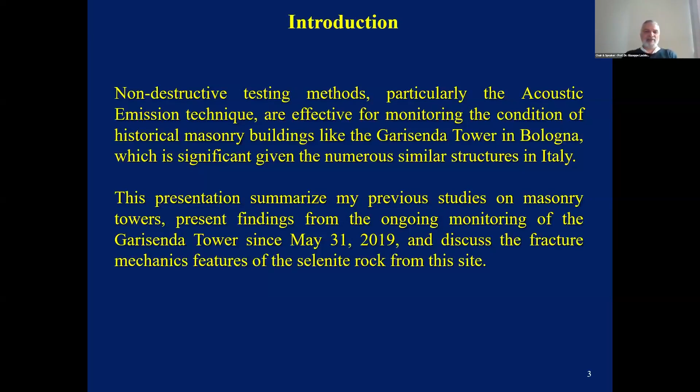I can start with a little introduction, saying that non-destructive testing methods, particularly the acoustic emission technique, are effective for monitoring the condition of historical masonry buildings like the Garisenda Tower in Bologna, which is significant given the numerous similar structures in Italy. This presentation summarizes my previous studies on masonry towers, presents findings from the ongoing monitoring of the Garisenda Tower since May 31, 2019, and discusses the fracture mechanics features of the selenite rock from this site.

Just a few words related to my previous monitoring of leaning towers in Italy. These are the towers of Alba, a city near Torino in Italy. Some years ago, we made, with other colleagues, the monitoring of all the ancient towers in Alba. This was published in some papers on important international journals.

Then we made the monitoring of this tower, the Asinelli Tower in Bologna. This is the tallest leaning tower in Italy: it is 97.30 meters tall and is leaning on the west side. On this monitoring, we published some papers, two of which are reported in this slide.

The other tower, the shortest one, is the Garisenda Tower, which is inclined towards the southeast direction and is not in such good condition now.

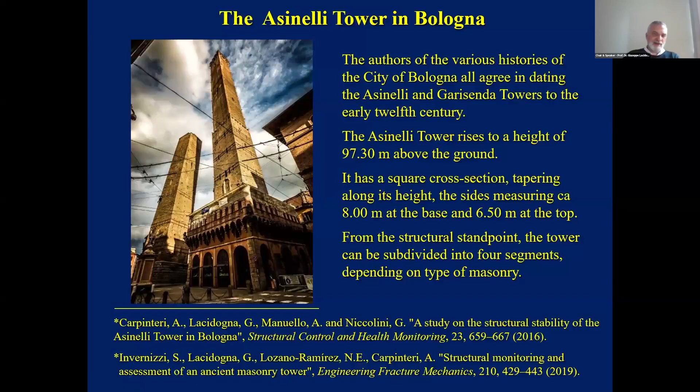Some words relating to the acoustic emission technique, that all the people speaking now, and probably also hearing me in this presentation, know about. But what is acoustic emission?

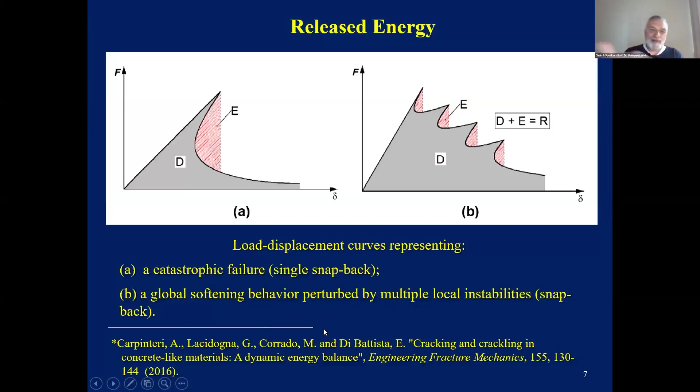We can have a single snapback instability or multiple snapback instability, depending on the test you are doing. This fact is well explained in this paper, which you can read if you want in the next days.

I will speak about acoustic emission monitoring in this presentation using a new device we have in our laboratory of structural mechanics at Politecnico di Torino, which is able to detect signals and send that data to a cloud wirelessly. Therefore, we can work comfortably, sitting at the table in our office. It's not necessary to go to the site, take the data, and go again to the office to make the elaboration.

What about the Garisenda Tower? It was completed in the early 12th century. It is now 48 meters tall and has a slope of 3.22 meters towards the west-south direction, in the opposite direction to the Asinelli Tower. It was originally 60 meters tall, but it was cut down because it inclined just after construction.

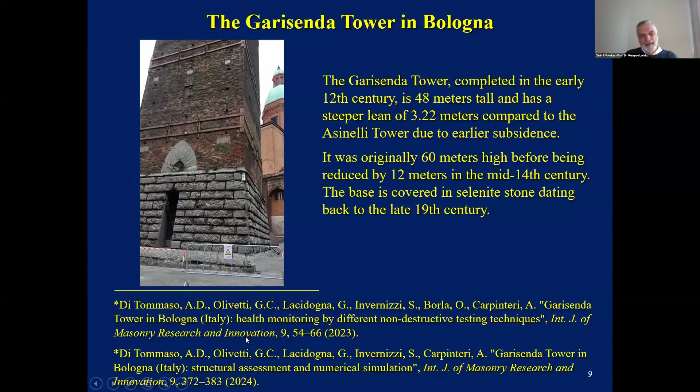Now it is 48 meters tall, and it is probably one of the most inclined towers in Italy, more than the Pisa Tower and so on. We wrote some papers on this problem in the Journal of Masonry, International Journal of Masonry Research and Innovation.

What about the monitoring system? I'll just speak of some of the devices applied in the tower: acoustic emission sensors, and fiber optic sensors, which were not from our laboratory at Politecnico di Torino, but were put in place by a firm named Smart Monitoring Italia, from the international group Osmos, whose principal headquarters is in France. Then there are also some thermometers for measuring the internal and external temperature of the tower.

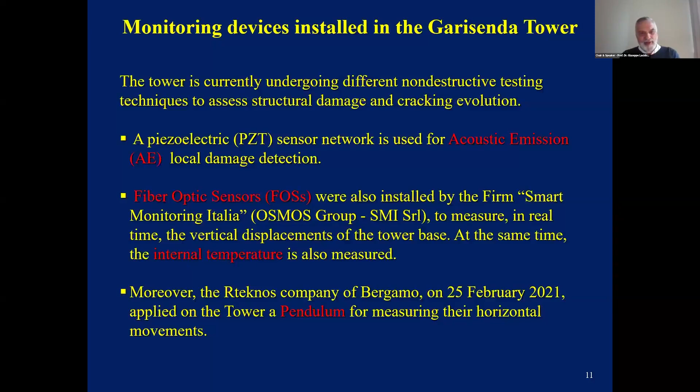More recently, a pendulum was also applied in the tower by the firm named Rteknos, a company of Bergamo in Italy. All these data are synchronized with the UTC time reference, so it's possible to make correlations between the data detected by the various sensors.

As regards the acoustic emission monitoring, the first device was applied on the 31st of May 2019 and is currently ongoing, for a total monitoring time of about 6 years to date.

Some technical data, not so important in this case, but the acquisition of data: the sampling rate is fixed at 5 megasamples per second, at 16 bits.

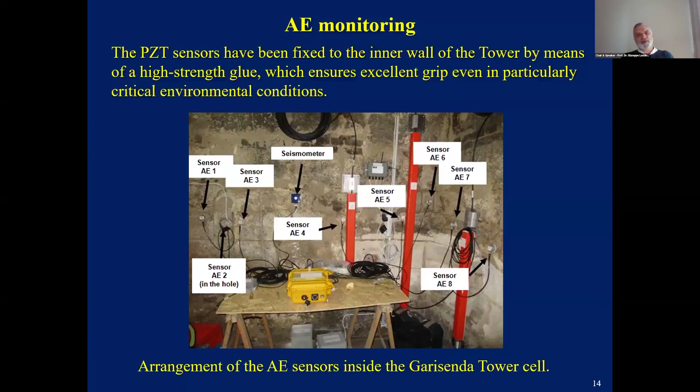At the beginning of the monitoring, there were also seismometers to understand if there are vibrations due to the earthquake or due to the environmental influence of traffic on the tower.

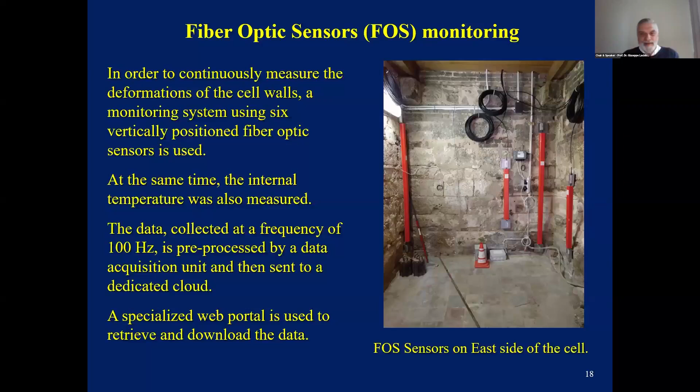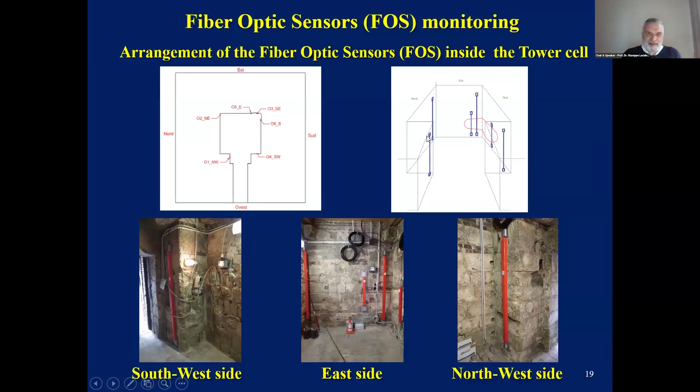What we found when we started monitoring is that during the winter season, we have naturally a contraction of the basement of the tower where the fiber optic sensors were applied, and in concomitance, we have had an increase in the acoustic emission hits.

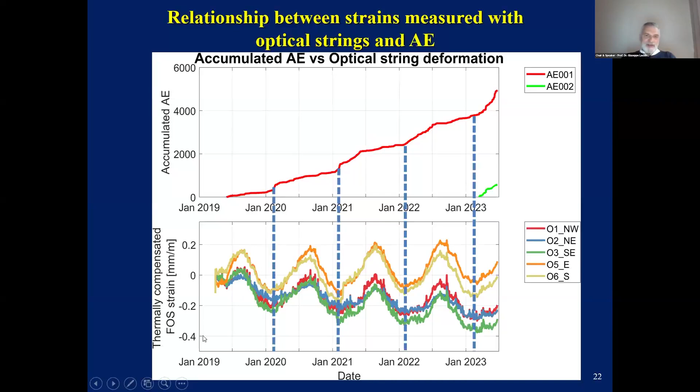This is another interesting diagram in which we can see that each time there is cold in the tower, we have a sudden increase in the acoustic emission hits related to apparatus number 1, and this continues from the start of the monitoring up to January 2023.

But as I said a few minutes ago, on 22 June 2023, we have a sudden increase in the acoustic emission events - look at this diagram in red - and also a sudden increase in the acoustic emission of device number 2. Therefore, this is in concomitance with an increase in the contraction, the vertical displacement of the tower.

Therefore, the area all around the tower was closed to people and also to traffic.

This diagram is also interesting because it represents the correlation between accumulated acoustic emission hits and the variation of temperature. You can see that when the temperature is low, around 10 degrees Celsius, 5 degrees, we have an increase in the acoustic emission. When the temperature is high, that is in the summer season, we have not much acoustic emission. And this is repeated for a lot of time.

But starting from signal number 6,000, we have behavior that is not so regular. Therefore, acoustic emission - and that means microcracks - increasing also during the summer season. This is for device number 1 and also for device number 2.

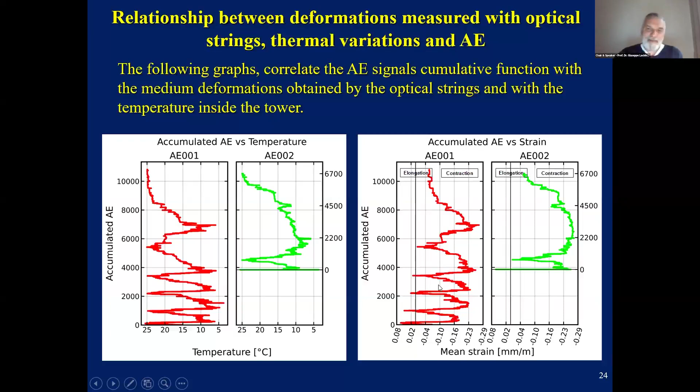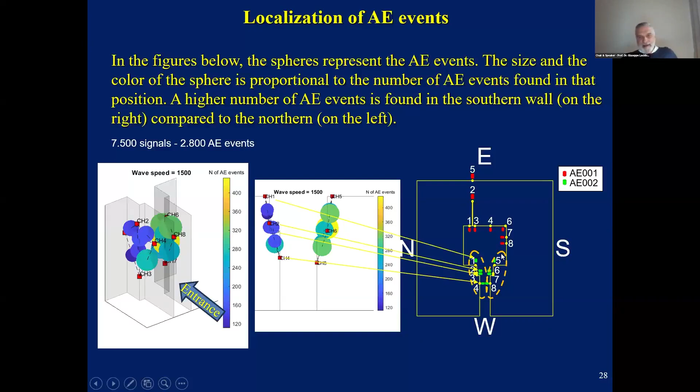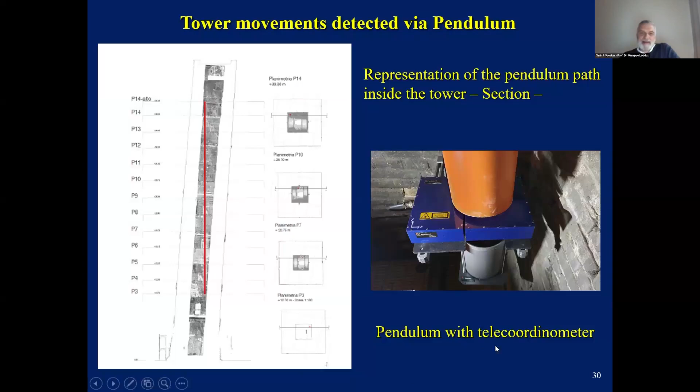The weight of the pendulum is embedded in a glass container with oil, and the horizontal displacement of the tower is calculated, detected by a telecoordinometer that is a series of lasers.

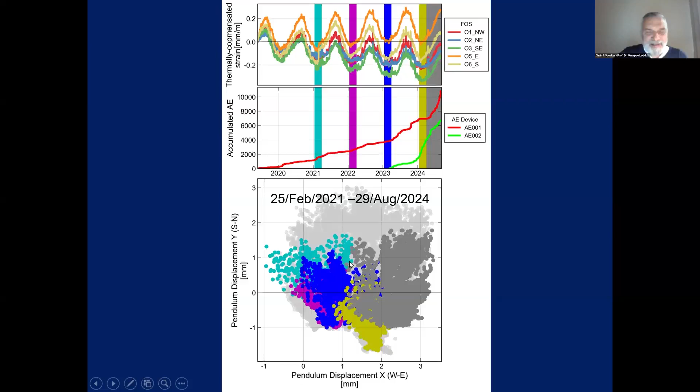This is another interesting diagram that represents the position of the tower during each winter season. This is the cloud of all the positions of the tower detected by the pendulum, and I can show you this series of diagrams. When we were in the winter of 2021, the tower was in the west direction. Therefore, we don't have a lot of acoustic emission signals, as you can see here.

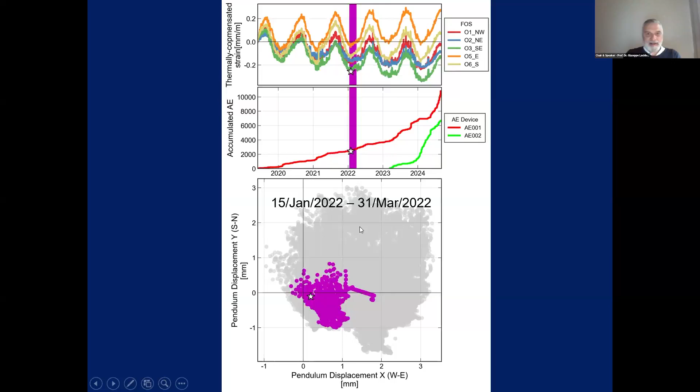When we were in the winter of 2022, the tower was in this position. Therefore, we don't have a lot of acoustic emission signals. There were signals, but not a lot. Then the tower displaces into this position, and when the area around the tower was closed, the tower was in this position.

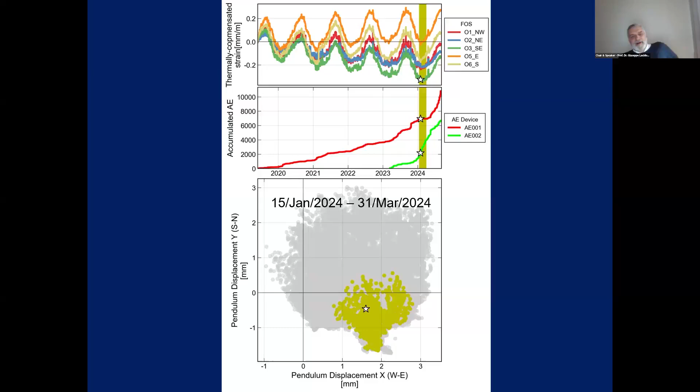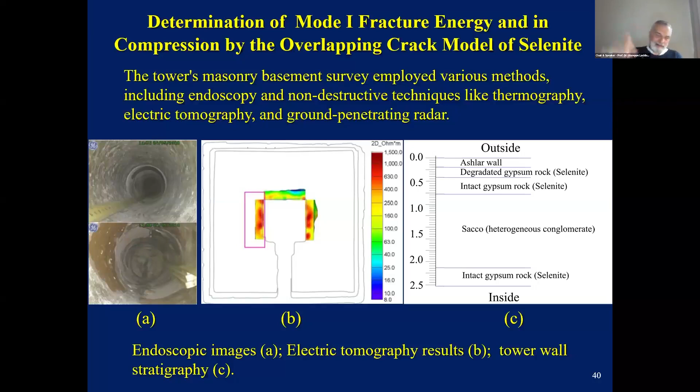As regards the fracture, the fracture energy of the material that composes the basement of the tower, that is more selenite. Selenite is gypsum. We made for the first time, probably related to this kind of material, the analysis of the fracture energy. We also made other tests in the basement of the tower, such as endoscopy, imaging, electric tomography to understand the pores that are in the selenite, and also other analysis like tower wall stratigraphy.

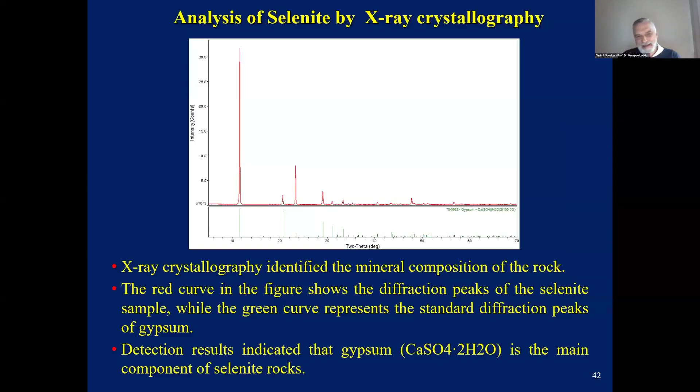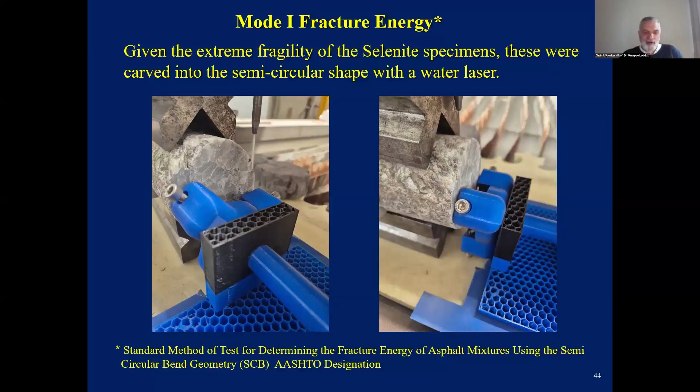Because that material was very brittle, we made the cut not with a mechanical device, but with a water laser. This made it possible to cut without destroying the specimen itself. We obtained specimens that are very useful for calculating the fracture energy of rocks. These have little notches, imposed so that a fracture starts from this point and goes almost vertically.

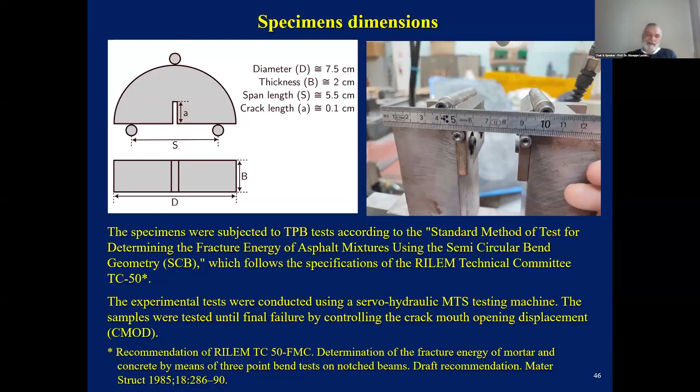This is a geometrical representation of the specimen, and this is the apparatus used for the 3-point bending test. We conducted the test using the RILEM Technical Committee recommendation.

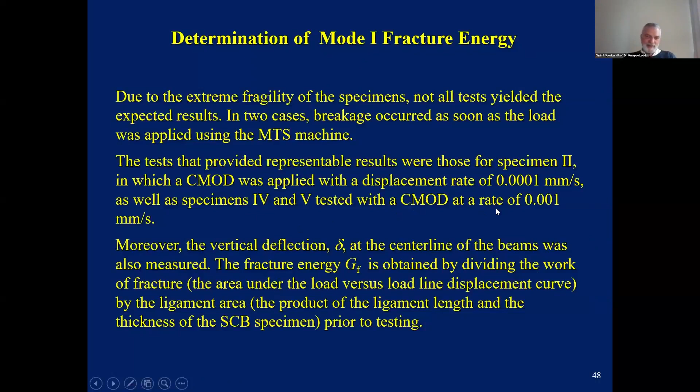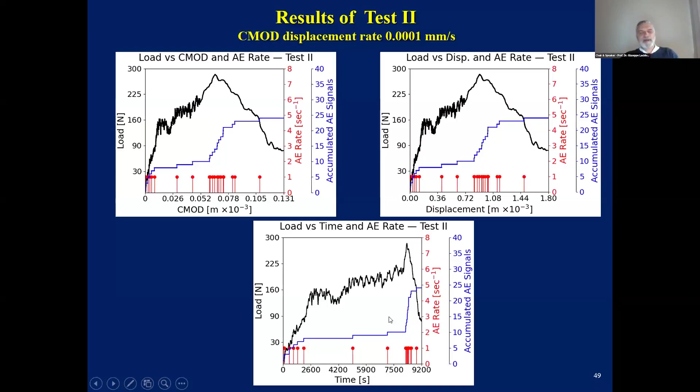You can see here the acoustic emission signals, the rate of the acoustic emission signal in red. In blue, there is the cumulative curve of the acoustic emission signal.

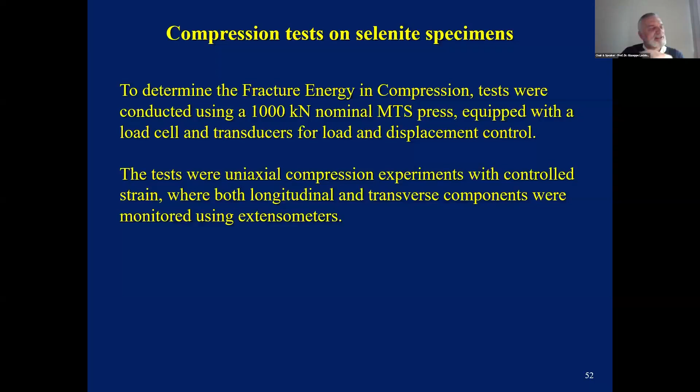Then we also made calculations to obtain the fracture energy in compression. This is new, because generally we do experimental tests to understand fracture energy under mode 1. But in this case, it is also useful to make this kind of test to put into a finite element model, composed in Diana, using the fracture energy under tension and under compression, to generate a model able to calculate the smeared crack inside the basement of the tower.

Then we made tests considering specimens under compression, conducted by guiding the circumferential expansion of the specimen itself. We made six tests considering specimens of the same diameter but with different slendernesses: slenderness equal to 1 and slenderness equal to 2.

This is a typical result of the test under compression, conducted using the horizontal deformometer. Here we represent the vertical displacement, here the circumferential displacement, and in red the variation of volume. This is the summation of the deformation in the three directions, epsilon 1, epsilon 2, and epsilon 3, divided by V.

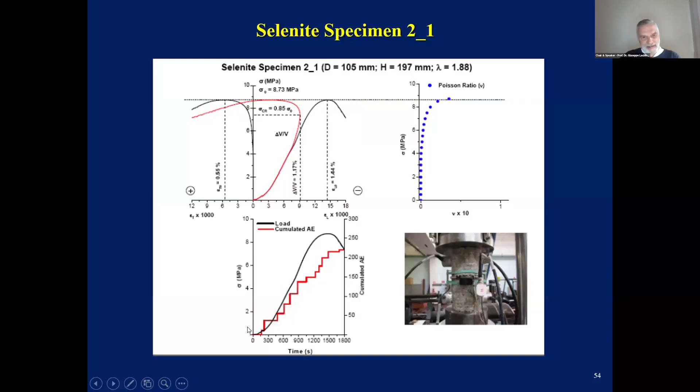You can see that when we have the maximum expansion in volume, we are just near to the collapse of the specimen, because we are near the peak load, and the horizontal displacement is increasing and increasing. This is the variation of Poisson ratio during the test, and this is the cumulative count of the acoustic emission signals. You can see that the selenite begins to emit acoustic emission near a stress of 0.2 megapascal.

These are tests that are very important to do in the laboratory. Considering the fracture energy in compression, we use a model named the overlapping crack model. In this model, we consider a first behavior of the material, considering the stress versus displacement, which is linear here.

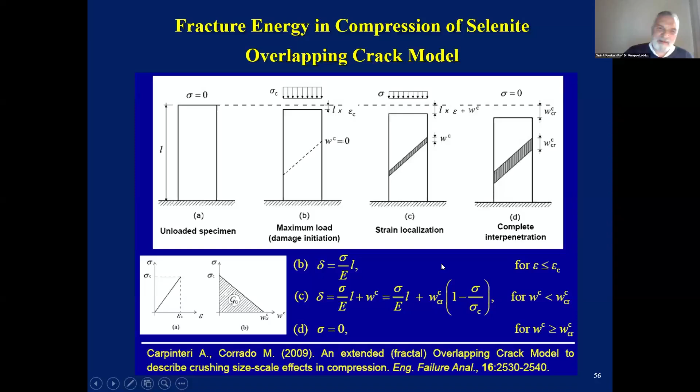Then when we reach the peak stress, we use this other law. That means we have a reduction in the stress, and when the stress reaches the value equal to 0, we have total interpenetration of this kind of material. This band of compenetration is similar to the band of the process of fracture under traction. But it's very interesting, because with this model it's possible to find the fracture energy in compression.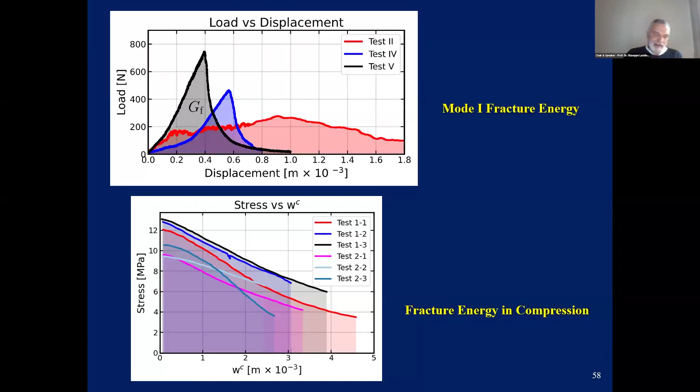Then we use the three-point bending test and the test under compression to put this data into a finite element model of the tower to calculate the smeared crack.

This is the model in few words and in few diagrams. The model has approximately 200,000 brick elements and 600,000 nodes.

But what we found was that the model was highly nonlinear. Therefore, we increased the tilt of the tower, and we found an increase of the smeared crack in the basement.

The results, when considering only that load, show some cracks in a position very near the acoustic emission device number 2. There are also some smeared cracks in the ground, but we don't have an acoustic emission sensor there.

But increasing the tilt more and more, when we arrive at about 2.5 degrees of inclination, we have the generation of this smeared crack, and the tower must go to collapse.

I just go to the conclusion. The monitoring data of the Garisenda Tower from May 31, 2019 to February 16, 2025 reveals the following key findings.

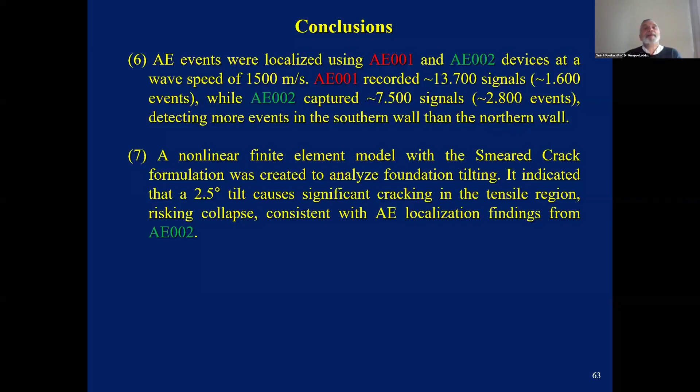I finish my presentation. Thank you very much for your attention. The presentation is now open for discussion, but I am probably running late.

Giuseppe, you have a question in the question and observation section from Emiliano Sampetti. Let me read it.

Is it possible to have detailed information about the PZT sensors? Yes, yes. If he writes me an email, I can respond to him.

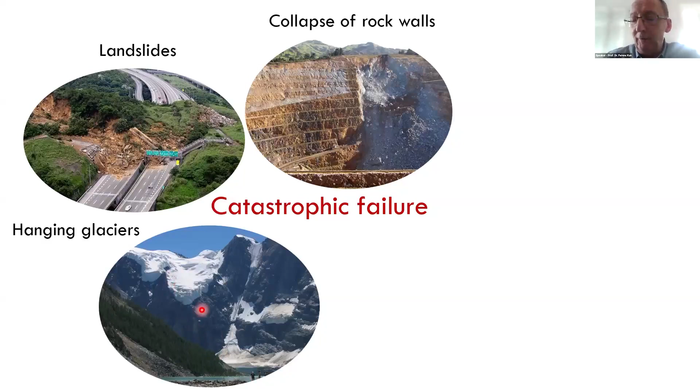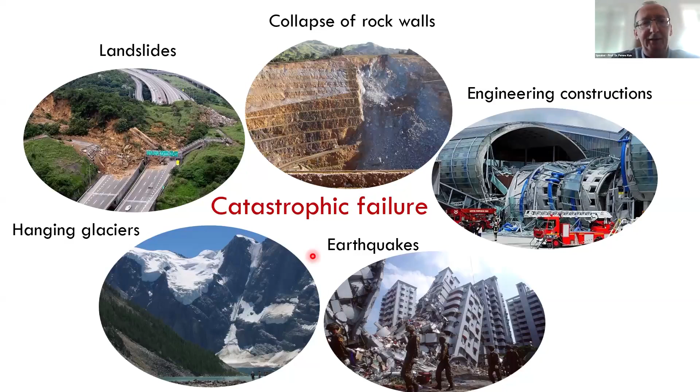At higher length scales we must mention earthquakes, and as we saw in the previous presentation, sometimes engineering constructions may also collapse. So today there's great motivation to develop methods to forecast the imminent catastrophic event. The basic concept of forecasting is that the catastrophic failure at the end of the process doesn't occur abruptly, but has signatures.

Especially, the dynamics of the process accelerates in many cases as the system approaches failure. This acceleration can be described by a critical scaling law. Here, omega denotes a general quantity characterizing the system, and the acceleration means that the time derivative of this quantity has a power-law dependence on time, where TF is the failure time, the time of the catastrophe.

As we approach failure, this expression predicts a power-law divergence of the rate of change of omega. So we have an expression containing the failure time, meaning that just using fitting or approximation techniques, we can try to forecast the imminent failure of the system. Of course, the quantity omega depends on the system studied and on the measurements we can carry out.

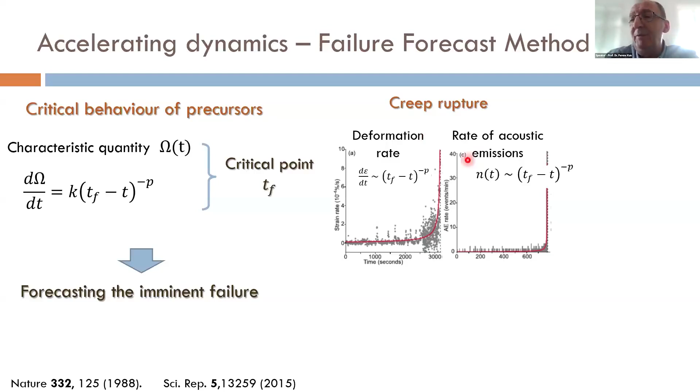For example, in creep rupture measurements, the strain rate was monitored, and it exhibited this power-law behavior nicely—you see the red line fitted the data with quite good quality. Then in the same laboratory experiment, acoustic emissions were also monitored, and the rate of acoustic events had a similar power-law acceleration towards failure.

So, forecasting means that before the catastrophic event, we are somewhere along the process, and we use this formula for fitting. By fitting, we obtain a good approximation of the failure time.

Recently, some interesting experiments were carried out about the role of disorder in the forecastability of catastrophic failure. In one study, synthetic materials were used and acoustic emission experiments were carried out. The authors tried to use this failure forecast method to estimate the failure time, and it turned out that forecastability depends strongly on the degree of disorder of the material. At higher disorder, one can get a larger amount of precursors, which can improve the precision of forecast. This was the motivation for our work.

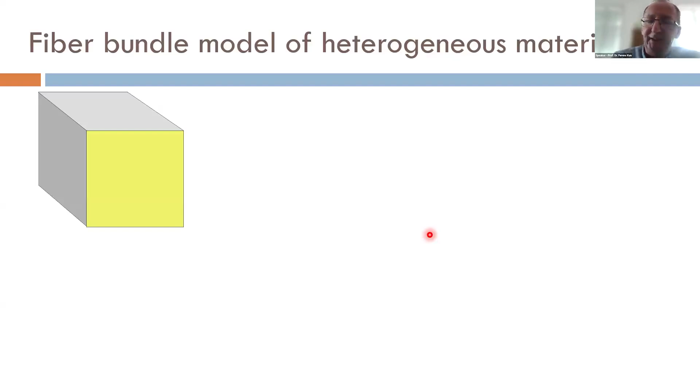We take a piece of material and discretize it as a set of parallel fibers arranged on a regular lattice. It's always a question whether the spatial arrangement is important or not. The fibers are not glued together, so the bundle can support load only parallel to the fibers' direction. Under slowly increasing external load, we assume each fiber has a linear response up to a threshold load where it irreversibly fails. Each fiber is characterized by two parameters: the Young's modulus and the failure threshold, or strength. In the simplest case, we assume the Young's modulus is constant over the fibers.

But to capture disorder of the material, we assume the failure threshold is random, described by a probability distribution. In the simplest setup of the fiber bundle model, this is the only point where we can really capture material dependence. If we carry out stress-controlled loading, after some time we reach the smallest failure threshold and the fiber breaks. Then the load of the broken fiber has to be overtaken by the remaining intact ones—the load has to be shared by the remaining intact fibers.

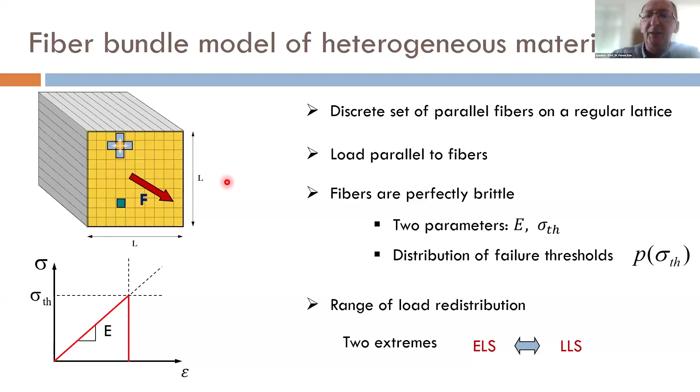For load sharing, or load redistribution, two extreme cases are relatively easy to study. One extreme is equal load sharing: when a fiber fails, the load it dropped is equally shared by all remaining intact fibers, so there are no stress fluctuations in the system—this is practically the mean field limit of the fiber bundle model. The other limiting case, also very relevant for practical purposes, is localized load sharing, where the load of the broken fiber is equally shared only by the intact nearest neighbors in the lattice. This implies large stress concentration around cracks. We studied both cases in our model.

In the modeling, it was important to have an opportunity to control the degree of disorder. That's why we decided on this functional form for the threshold distribution: a power law where the threshold values lie between two bounds, with the lower bound of the interval fixed at one.

That means immediately that we have two parameters to control, especially to control the degree of disorder. One is the upper bound of the strength values, which can change from the lower bound up to infinity, from zero width to infinite width of the distribution, and then the exponent. So we have these two parameters: upper cutoff of the strength values and the exponent to control the amount of disorder.

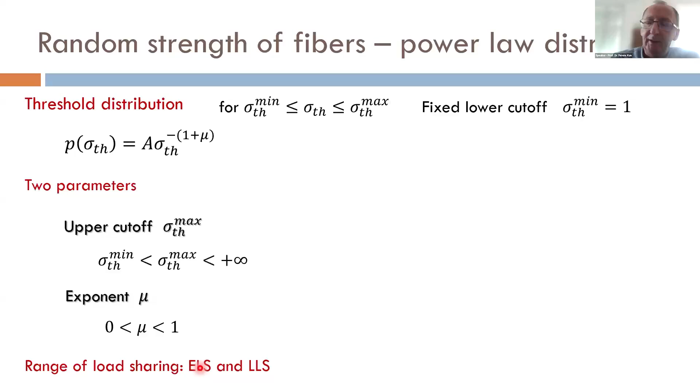The key point is that at any value of the exponent, if the upper cutoff is too small, meaning the disorder distribution is too narrow, we obtain perfectly brittle behavior, which means abrupt failure—already at the breaking of the first fiber the entire bundle will collapse. If the distribution is sufficiently broad, when the upper cutoff is sufficiently high, we obtain stable cracking, so fibers can break in sequences, and the system approaches failure through breaking sequences of fibers. This is what we call quasi-brittle behavior, and we can determine the phase boundary between the two regimes analytically.

It's visible that disorder has a substantial role in the failure process. This was crucial for us.

When we subject this bundle to a slowly increasing external load, the key point is that the failure process evolves through avalanches of fiber breakings. This means the following: we slowly increase the external load to break just a single fiber, and then the load dropped by the fiber is redistributed in the bundle. This implies immediately load increment on the intact fibers.

So there may be fibers which exceed their breaking threshold, then we may obtain triggered breaking. But again, this triggered breaking will be followed by load redistribution, and so on—this load redistribution may be followed again by triggered breaking. So starting from a single fiber breaking, we can generate a cascade, an avalanche of fiber breakings.

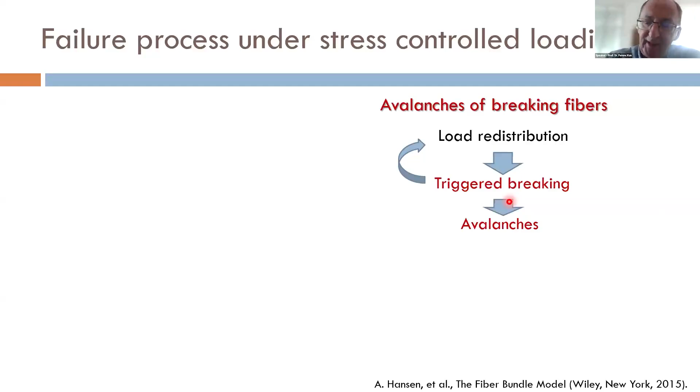In the fiber bundle model, these breaking avalanches correspond to the acoustic emissions that Professor Lacidogna presented in the previous talk. Then for the case of equal load sharing and for moderate amount of disorder, one can prove analytically that the size of bursts—the number of fibers failing in avalanches—is power law distributed, and the exponent is also kind of universal, 5/2, at least for these types of distributions.

In our model we have the possibility to tune the amount of disorder. That's why it's good to look at the behavior of the system in the limit of very high disorder, when the upper cutoff is infinite. This is what we obtain: a stationary sequence of events.

This is just the size of avalanches as a function of the order number—they are just counted, this is kind of natural time, it's called—and you see the moving average is also quite constant. So it means that in the limit of very high disorder, the failure process of this bundle is kind of unpredictable, because we have a stationary evolution.

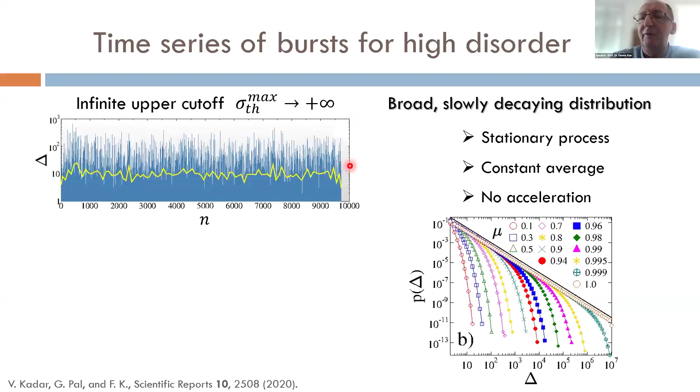It's still true that the statistics is scale-free, so the size distribution of avalanches is power law. The only difference is the exponent is 3/2, and the only role the exponent mu of the distribution has is that it controls the cutoff of the distribution.

Then if we check the behavior of the system when the amount of disorder is a little bit smaller—I call it moderate disorder, at finite upper cutoffs—this is what happens: again we observe a kind of stationary behavior at the beginning of the evolution, but then close to failure we see a kind of acceleration of the dynamics. We see that the average avalanche size is increasing, and the load increments between consecutive events are decreasing. So this is what we want to characterize somehow.

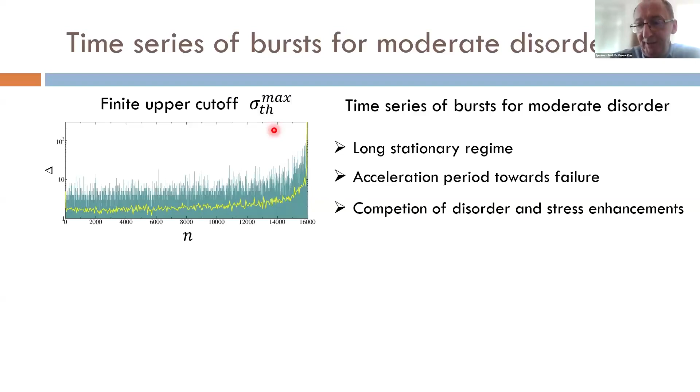We would like to obtain a kind of signature of the onset of acceleration towards failure by analyzing the structure of this sequence of events, sequence of avalanche sizes. So our suggestion is to focus on special events of the time evolution.

These are the so-called record size events of the time series. For us, record is like records in sports. A record is an event here, an avalanche, which has a size greater than any previous event. And if you assume that the first event is a record, then using this condition you can identify the consecutive records one by one, which form a kind of monotonically increasing subsequence of the evolution.

The advantage of looking at records is that these are always the largest events, so it's kind of easy to handle them, easy to identify them, because we are not searching for something inside this noisy background, but we have to check the most dominating events in the time evolution.

Then to characterize these record size events, we can introduce a couple of quantities. Records are identified by order number, by the rank. Then, of course, we have their size. And they occur at a certain event number in the sequence — this is the event index.

And then we can look at the increment between consecutive record size events. But finally, one important quantity is the waiting time between two consecutive records. This is the number of events the system has to generate to overcome the last record — this is the kind of lifetime of the record size events. So these are the main quantities we looked at to understand how we can profit from the record statistics of avalanches when we study fracture phenomena.

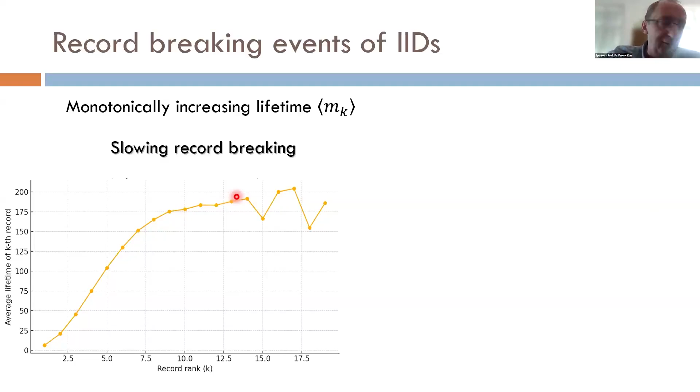And then finally, the distribution of record lifetime has a power-law form, and even the value of the exponent is kind of universal, doesn't depend on the distribution of random numbers. So then the question is, when we analyze record size events and the statistics of records, whether record breaking is only governed by statistics, like in the final of a 100 meter sprint, or there is something special in these record size events. Our answer will be positive about these special features.

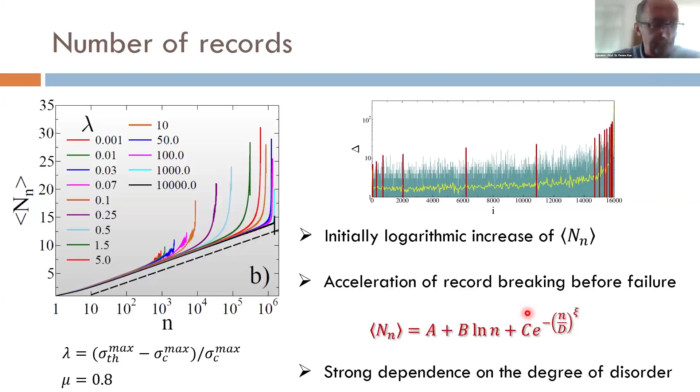We observed that the number of records strongly depends on the amount of disorder in our system. Similarly, very interesting is the lifetime of records, how they evolve in such a fracturing system. This is a very important outcome. Here you see the average lifetime of records as a function of record rank for different amounts of disorder.

At low disorder, close to the case of perfect brittleness, and at very high disorder, when we have practically ductile failure, we have a monotonically increasing lifetime, which means everything is controlled by disorder. But at intermediate disorder, initially the lifetime of records increases, meaning the initial regime is controlled by disorder in the fracturing, but at a certain point in the dynamics, the lifetime starts to decrease. That means record breaking accelerates, and we approach failure through the acceleration of the breaking of consecutive records.

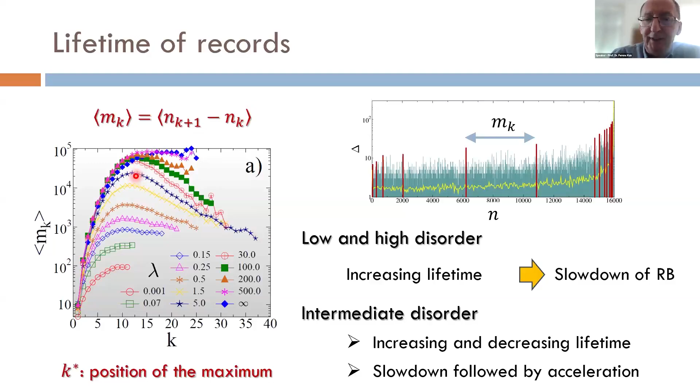We can identify the record rank, the rank of that record which has the highest lifetime, and of course that separates the two regimes.

So the final outcome of this analysis was that the beginning of the failure process is controlled by disorder, and this shows up in the record breaking process such that the record breaking slows down because it becomes harder and harder to break the previous record. But close to failure, when stress enhancement after avalanches starts to overcome the control in the failure process, we observe the acceleration of record breaking. The two regimes are separated by this critical record rank, the rank of the record which has the largest lifetime, or actually the record after the longest living record.

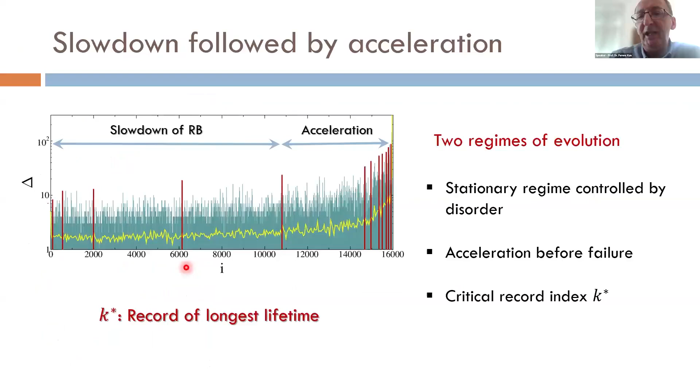So it means that looking at the record breaking process during the failure of these heterogeneous materials, analyzing the record statistics of acoustic emissions, we may be able to identify the onset of acceleration just by identifying the longest lived record. Of course, it's a question how significant the maximum of the lifetime is.

That's why we calculated the difference of the rank number of the record which has the highest lifetime and the last record in the experiment, in the measurement. We also determine the lifetime of the longest living record and the lifetime of the last record in the system. Here you see these quantities plotted as a function of the amount of disorder, the distance from the phase boundary in the disorder plane, for different values of the exponent of the disorder distribution.

It's clear that at low amount of disorder and at very high amount of disorder, the acceleration is not significant, or it's not even present. But there is a well-defined window of disorder where we can have the chance to have good predictions, an early identification of the signature of the acceleration towards failure.

Then we studied the entire disorder plane. Here you see this quantity delta K, the difference of the record rank of the last record and the record which has the highest lifetime, on the plane of mu and lambda. You can see that when we are close to perfect brittleness, close to the phase boundary, we have only a few events before failure, and everything is controlled by the low amount of disorder the system has. So we have no chance for forecasting, there is no acceleration.

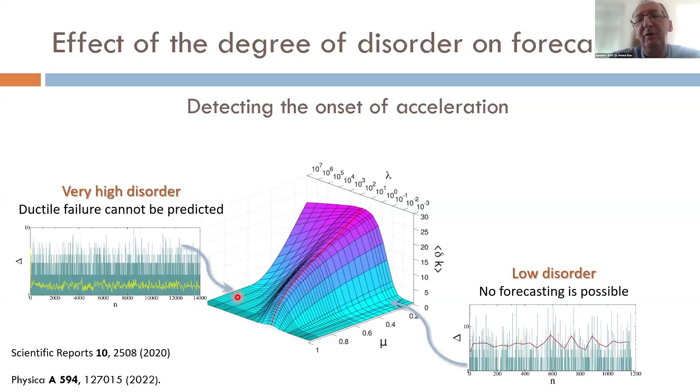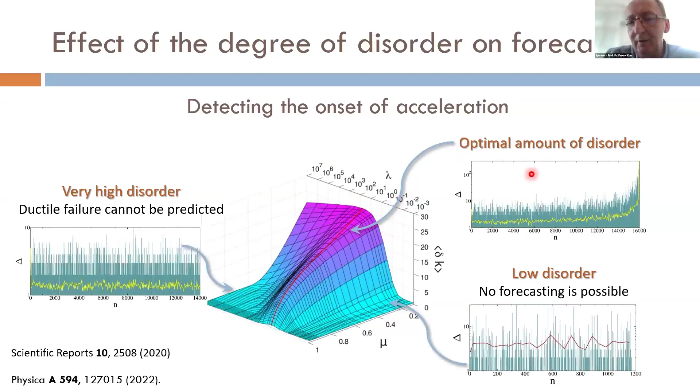The same happens in the limit of very high disorder, where we have kind of ductile failure in this simple model. We again have a stationary evolution of avalanches with a steady moving average, so again no chance to identify acceleration. But in between, there is a kind of optimal amount of disorder, a range where we have a good chance to identify early signatures of the imminent failure, or at least a clear signature of the onset of acceleration towards failure.

Then, of course, it's a question how general this mechanism is. We studied the role of the range of load sharing in the statistics of records in fracture processes. Here, this is the same fiber bundle model, but now fibers are assigned to the sites of a square lattice, and we used localized load sharing.

Here, the black areas are cracks, and you can see that along the perimeter of cracks, we have large stress concentration. Of course, this stress heterogeneity, together with the disorder of fiber strength, plays a significant role in creation of the avalanche sequence.

This figure compares the case of equal load sharing, what you have seen before, and the case of localized load sharing. The high values of delta K above the disorder plane are the data you've seen in the previous slide, and the localized load sharing values are this dark green area. You can see that in the case of localized load sharing, when we have strong stress concentration around cracks, the acceleration is less significant because failure becomes much more abrupt, but still there is an optimal amount of disorder, a range where we have a good chance to forecast failure.

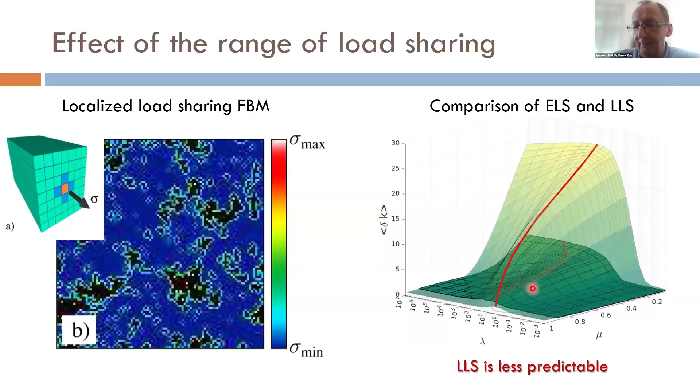The last example is compressive failure of geomaterials, where we used a discrete element model to simulate the compression of sandstone samples that had been performed in the laboratory. We obtained synthetic time series of acoustic emissions, synthetic time series of avalanches of the breaking of contacts of particles, and observed similar behavior. So we constructed the synthetic series of avalanche sizes.

So just to conclude, our suggestion is to use record statistics to try to identify a clear signature of the onset of acceleration towards failure. We show that record statistics is very sensitive to the degree of disorder, and especially it can be used to characterize the competition of disorder and the stress enhancement in the failure process. We can use the record with the longest lifetime to identify the point of the onset of acceleration towards failure. We think this should not be used as an alternative method compared to others, but it could complement existing methods when we analyze the statistics of records.

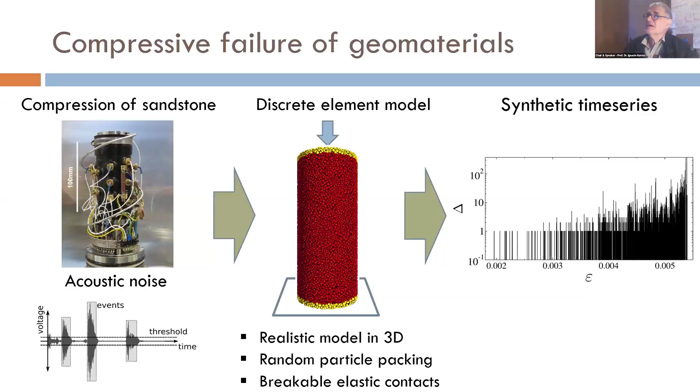My name is Ignacio Iturrioz, and this is the title of my presentation: Application of Discrete Element Strategy to Aid the Interpretation of Acoustical Emission Data in the Damage Process of Structure.

I organize my presentation in this way. I speak about three keywords: phase transition phenomenon, acoustical emission technique, and simulation using discrete element method.

About the phase transition phenomenon, it's an important topic in physics statistics. The phenomenon happens when matter changes state - solid to liquid, liquid to gas - but also in quantum mechanics, in change of magnetization properties as a function of temperature, and in the rupture of quasi-brittle materials such as rocks, concrete, ceramic, and composite.

In this last example, it's linked with a more general problem called crackling that appears clearly in the famous Gutenberg-Richter law. These changes are due to collective behavior - no changes are produced inside the atoms or molecules when the phase transition happens.

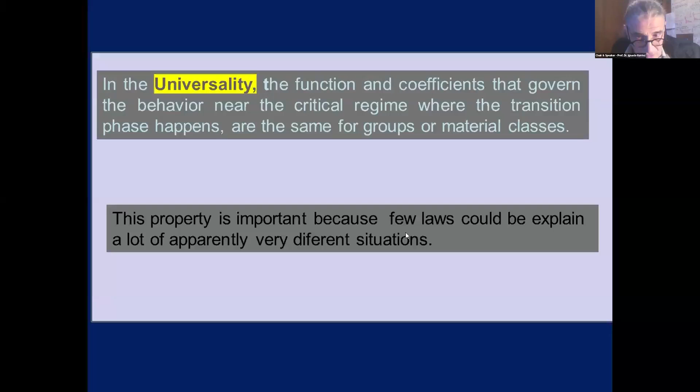In phase transition problems, universality and autosimilarity are two characteristics that are always present. In universality, the functions and coefficients that govern the behavior near the critical regime, where the transition phase happens, are the same for groups or material classes. This property is important because a few laws could explain a lot of apparently very different situations.

If we like to represent, for example, a spatial region - in this case a 2D region - with local situations, we have break or mark in black and unbreak marked in white, or a region with paramagnetic or ferromagnetic situation, or part liquid and part gas, it's possible to apply some method to pass the information in a coarse mesh, and then we rescale.

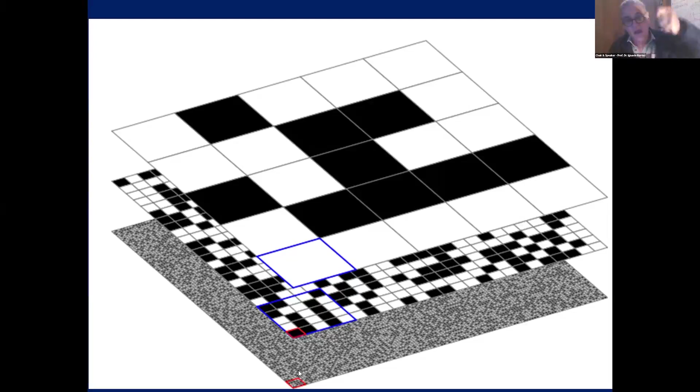If we apply this procedure in sequence, it's possible we see this situation. When we stay in the critical or close to the critical regime, it's possible we see that in this domain the pattern does not change. But if we stay far from the region in which the phase transition happened, it's possible we see that the pattern changed. Here we became all white, and at the bottom we came to all points being black.

In the middle, we have autosimilarity behavior, and it's possible to represent what happened in the critical regime using a power function. In the other cases, it's not possible, because when I change the scale, the results change, and for this reason the results become a function of the scale.

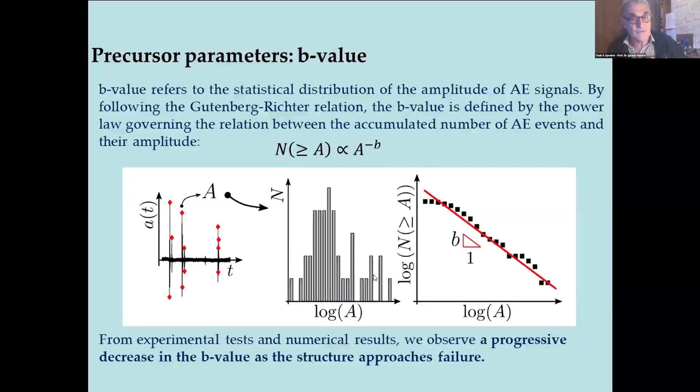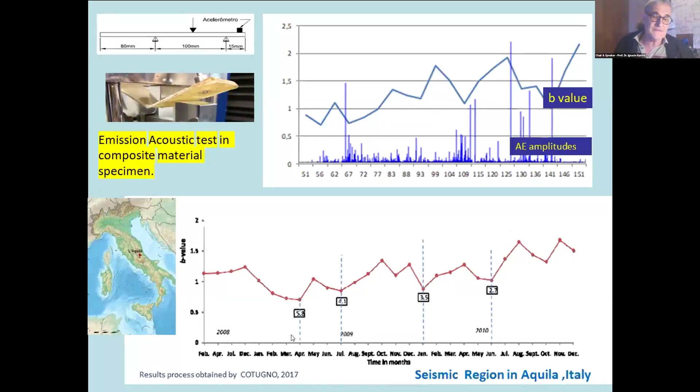Okay, then the third keyword is about the discrete element method. There are many of these methods. The fiber bundle model is one of these, and Professor Feng mentioned the particular method originally proposed by Cundall.

Our group works with two strategies, but these are very similar. One is the peridynamic approach, and the other is a version of the lattice discrete element method. In the peridynamic approach, we have material points with mass, and in a region that I define with a radius called the horizon, delta.

We connect all the points that are inside this region for the X point. If I change the point, we use the same radius and connect other points with bonds. In the case of the discrete element method, we use a fixed range for the bars, but there is a similarity between the two strategies.

The motion equation includes the mass at the node, some damping, and the internal and external forces are also computed. It's possible to apply some explicit scheme of integration to solve the problem.

It's possible, using this method, because we integrate in time, to obtain a simulation of the acoustical emission test. It's possible to directly put a virtual sensor at the material points, and I obtain the acceleration at this point. This is one.

One direct method: another method is if in all the steps I compute the kinetic energy. And if I derivate the kinetic energy, it's possible to obtain information that is very similar to the acoustical emission test. It's not the same because we don't have a delay, but the shape of the waves is similar.

Well, briefly, because I have only 10 minutes, about the application. We present here some application: a prism of basalt, with an inclined fissure.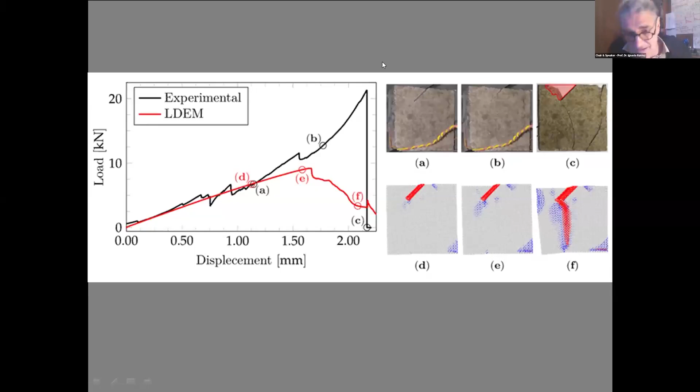For this reason, the way that this body broke was complicated. But we also simulated this situation using the model, and when we simulated it we put very good supports, rigid supports, and we have this response. In the experimental response, it was totally - not totally, but very different. But, well, this is wrong.

Well, it's interesting because in this case we have a benchmark to test a different situation in which local instabilities appear, and we see if the B-value and the other parameters would indicate if the local instability appears.

This is another parameter that is obtained by Devsky, Pradhan, and Hansen, but I unfortunately don't have time to explain this now.

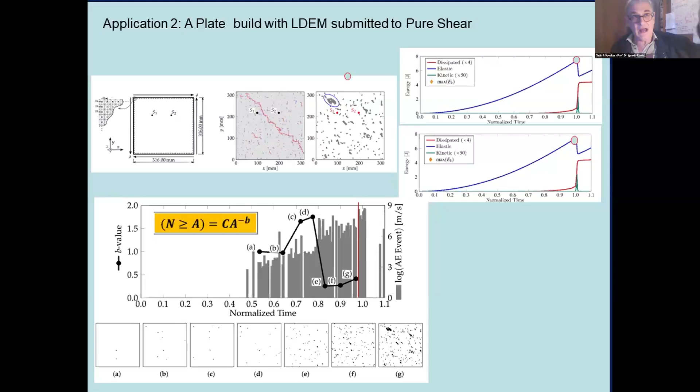Also interesting information: here we have a region where we accumulate some damage. This happens near the imminent collapse, and it's possible to see that this dimension is proportional to the equivalent D dimension. When we have a fissure with the equivalent D dimension, it's possible that this fissure propagates when some critical level of stress is applied.

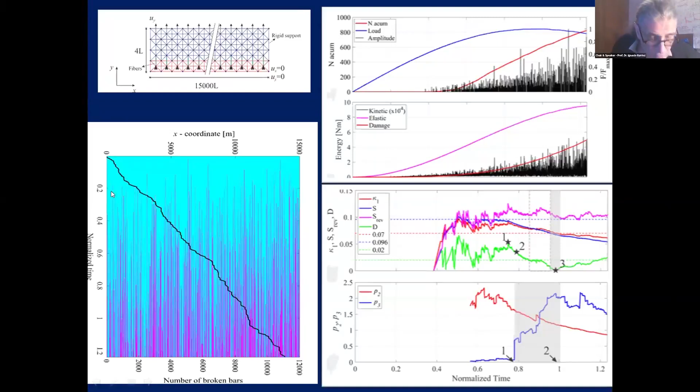Here we present the results in terms of the normalized time during all the process, and this is the spatial time. This model is 2D. In black we show the way all the bars are broken. In light blue we have unbroken bars, and in red we have the broken bar.

Okay, this is about the conclusion. We spoke about three keywords. The global parameters computed from the signal captured in the acoustical emission technique could be used as a precursor to the proximity of local or global collapse. This fact could be understood in the phase transition framework, and the simulation using the discrete element method of the acoustical emission technique in a structure could give complementary information to aid the real acoustical emission interpretation.

Now I close my presentation, and please, Professor Leandro, put up your presentation.

Okay, good morning, good afternoon everyone. I'm Professor Leandro Ferreira Friedrich from Federal University of Pampa, and I will continue the presentation of Professor Ignacio, named the application of discrete element strategies to aid the interpretation of acoustic emission data in the damage process of structures. I will focus on presenting some case studies by employing discrete element strategies.

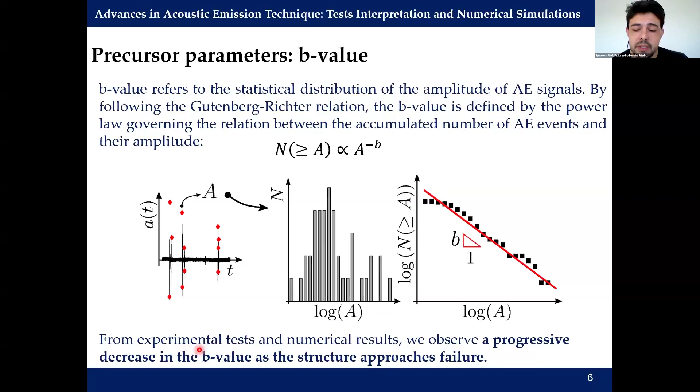From our experimental tests and numerical results using this data, we observe a progressive decrease in the b-value as the structure approaches failure. Therefore, this is the signature when we employ the b-value in order to know if the structure will fail.

The natural time analysis is a recent tool developed by Varotsos to identify when a complex system enters a critical stage. Basically, in natural time, the conventional time between events is ignored. Here in this figure, you have a conversion of the conventional time to natural time.

But the energy of the event is preserved, which in terms of acoustic emission could be the amplitude of the acoustic emission signal or the acoustic emission energy, and another feature that characterizes the acoustic emission event. And of course, the natural time here is a ratio between the k-th event divided by the total number of events in the time series.

Details about the natural time analysis can be found in the book by Varotsos, Natural Time Analysis: The New View of Time. In natural time analysis, four parameters should be computed: the natural time variance, the entropy, the entropy on the time reversal, and also the average distance. These four parameters have a critical value, and therefore are used to identify when a critical situation is going to happen in the system.

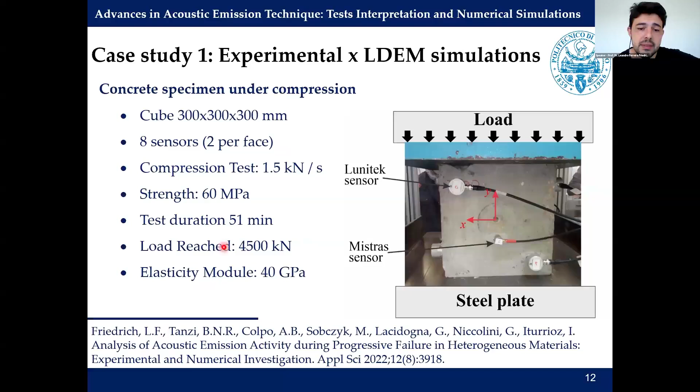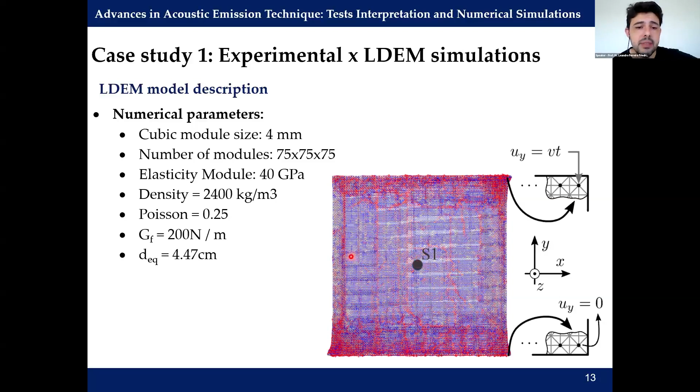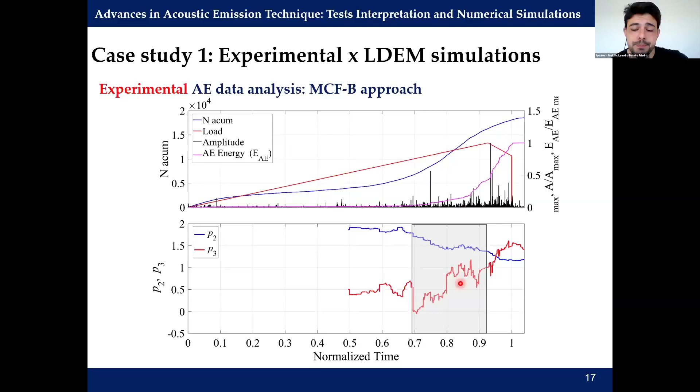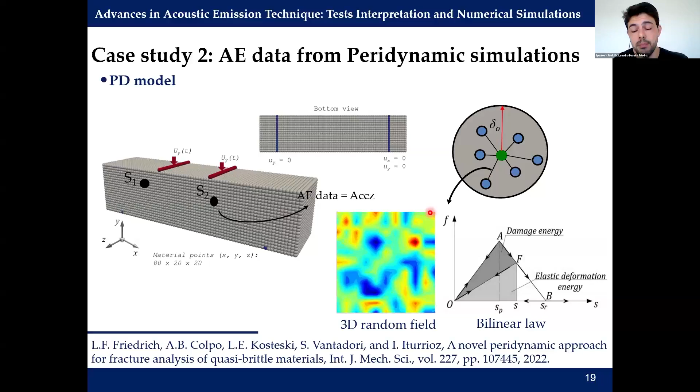Using the acoustic emission data, we analyzed the b-value and the natural time for this numerical case. There are no experimental results for this case. The first parameter is the b-value, and at the beginning of the numerical record we see just a few acoustic emission signals with low amplitude, so a high value of B is computed.

However, very close to the time of the failure of the structure, which happens suddenly, the b-value shows a sharp decrease, indicating the rupture.

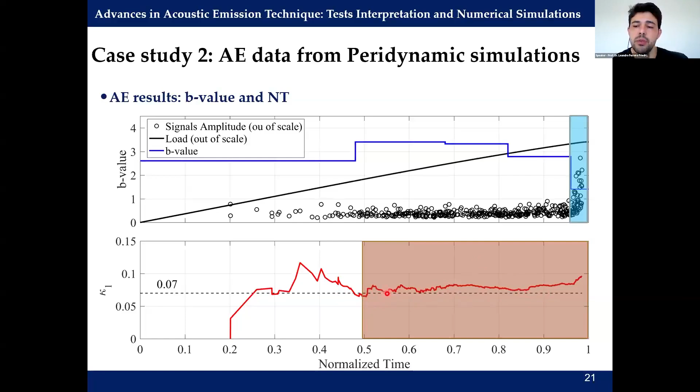When we analyze the natural time, we look at the variance of natural time, which is our order parameter used to know the criticality of the structure. It's possible to see that close to the normalized time of 0.5, according to the natural time, we already have the criticality, and this value is very close to its critical value, indicating that after this point the structure is already in a critical situation.

Based on the results obtained from simulations, acoustic emission proves to be a powerful tool for detecting and analyzing failure mechanisms in structures. The use of simulated acoustic emission data enables controlled investigations of complex scenarios, providing valuable insight into the damage evolution, and advances in computational modeling, signal analysis techniques, and numerical methods continue to expand the potential of acoustic emission in research and engineering applications.

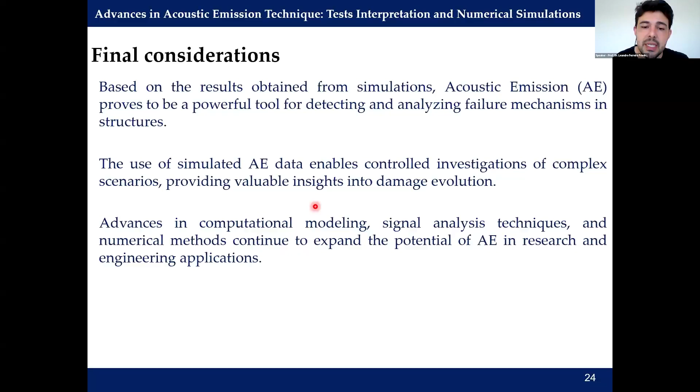Thank you very much, Leandro. Well, now I've killed the schedule, but if there are some questions or commentary, please go ahead. Very interesting talk, thank you.

How do you define entropy in this system? You reply, Leandro.

Yes, basically this entropy is computed by using the energy that characterizes the event, which could be, in terms of acoustic emission context, the amplitude of the acoustic emission event, or could be another feature of the acoustic emission signal, such as duration, rise time, or another parameter. The specific equation to compute the entropy could be found in Varotsos's book. It's not so complicated, and it's very similar to Shannon entropy, another kind of entropy, but is also used to know the disorder of the system.

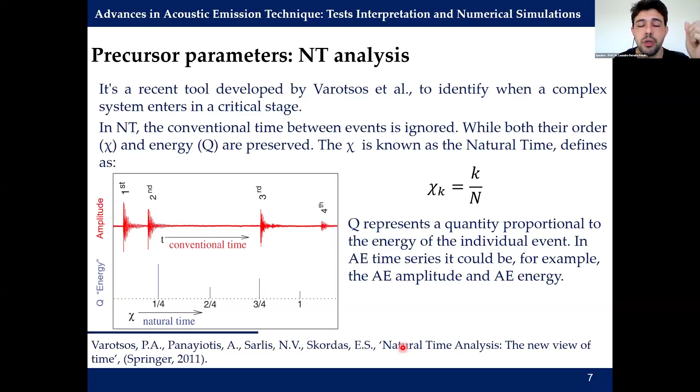Thank you. One more question. Okay, thank you very much. And now, please, Professor Giuseppe, if you'd like to speak a few words.

My compliments to Leandro, and also to you, for your very interesting presentations related to numerical models and acoustic emission. Probably it's very difficult to understand for the first time if you hear a presentation from Leandro and also from Ignacio, but I know that they are very powerful. I've written some words that I can share with the people listening now to our webinar.

Therefore, these are my webinar concluding remarks. Thank you for joining today's insightful webinar on the interaction between numerical strategies and experimental tests in acoustic emission techniques. I began with a presentation focused on the application of acoustic emission and other non-destructive techniques to real-world challenges, such as the case of the Garisenda Tower.